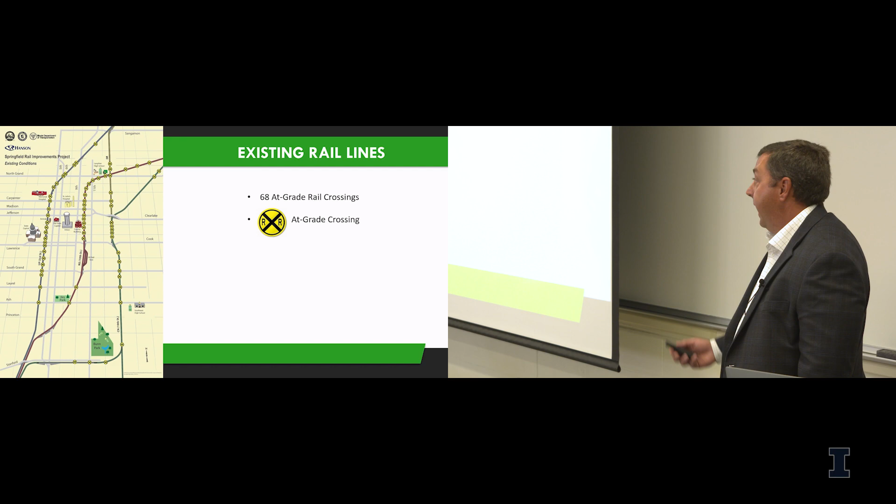In Springfield, there are 3 north-south rail corridors. On the map, on the very far left-hand side is the Union Pacific corridor. That's what we call the 3rd Street corridor because it parallels 3rd Street within Springfield. In the middle is the 10th Street Norfolk Southern corridor, and on the right-hand side is the 19th Street CN rail corridor. In all, Springfield has 68 at-grade crossings, which is a pretty significant amount for a town of about 120,000-ish. It's a pretty high per capita for at-grade crossings. So anytime you have vehicles and trains, there's always a potential of an accident.

In 2010, we did some investigation to determine there's about 35 trains a day going through Springfield. Moving forward to 2030, there's going to be an anticipated 81 trains per day. A pretty significant growth for the Union Pacific, and that's really related to high-speed rail, as well as an intermodal facility that was constructed several years back in the town of Joliet. So a pretty significant increase in both freight and rail traffic through Springfield on the 3rd Street corridor.

The 10th Street corridor is where the Norfolk Southern is at. There's a pretty modest increase in train traffic that's expected there.

The Canadian National Corridor is a little less traveled, with a minor increase in train traffic. In all, we're looking at going from 35 trains per day up to 81 trains per day over the next 20 years.

Rail consolidation in Springfield has been talked about since the 1920s, so it's been around for about 100 years. There was a city plan back in the 20s that discussed the consolidation of rail, but nothing really happened from that other than some at-grade crossings were constructed.

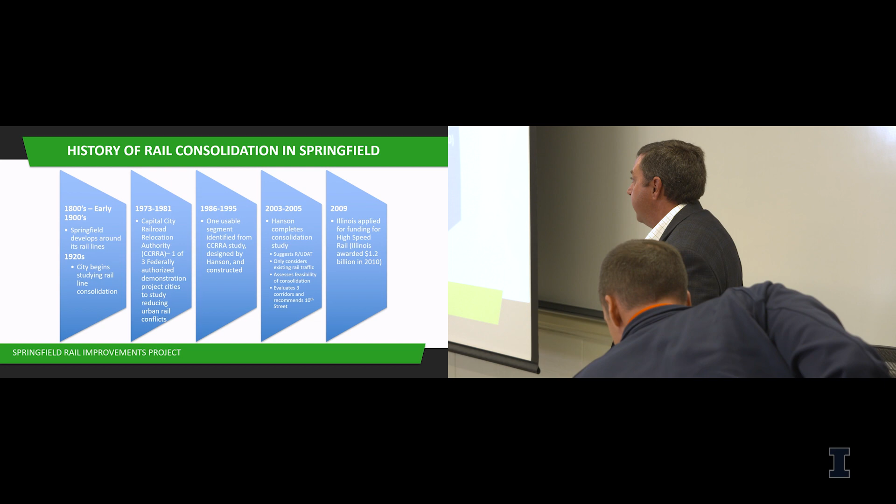In the 70s, there was another project—the Capital City Railroad Relocation Authority—that was started, and that also talked about the consolidation of rail in Springfield.

Moving into the 80s and 90s, part of that project was implemented and we were able to work on it. Then in 2003 to 2005, we were involved in a feasibility study looking at rail consolidation.

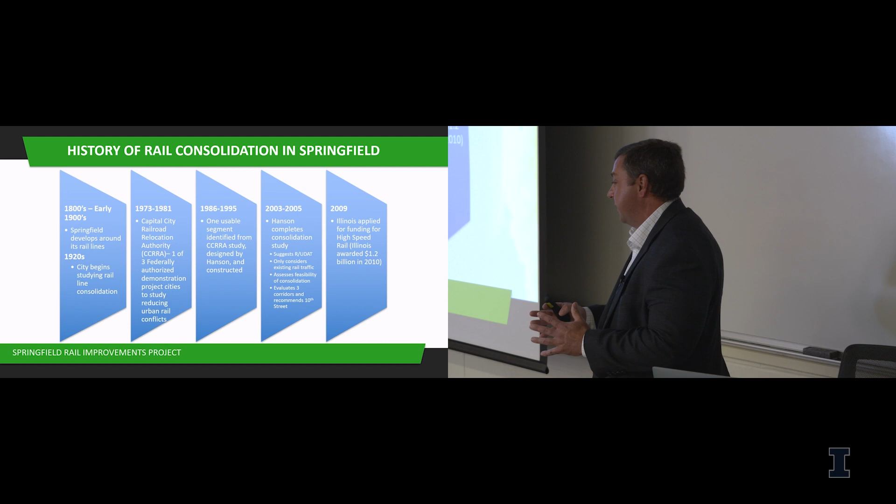Shortly after that, IDOT got $1.2 billion for the high-speed rail program. Since that timeline, we've been heavily involved on the engineering side—environmental work from 2009 to 2012, phase one planning engineering, then real design starting in 2013 through right now.

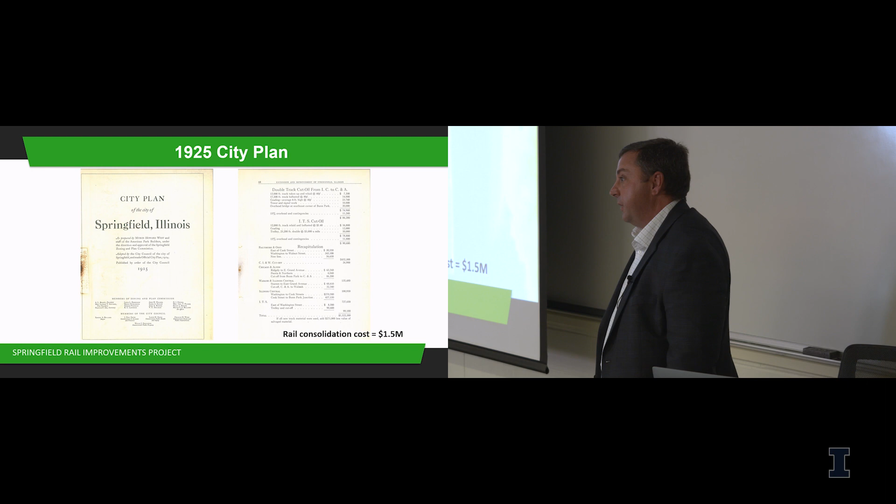We still have some of that issue today along the different corridors in town. When we complete the project, we expect it to be much safer and a lot better place to live for the citizens.

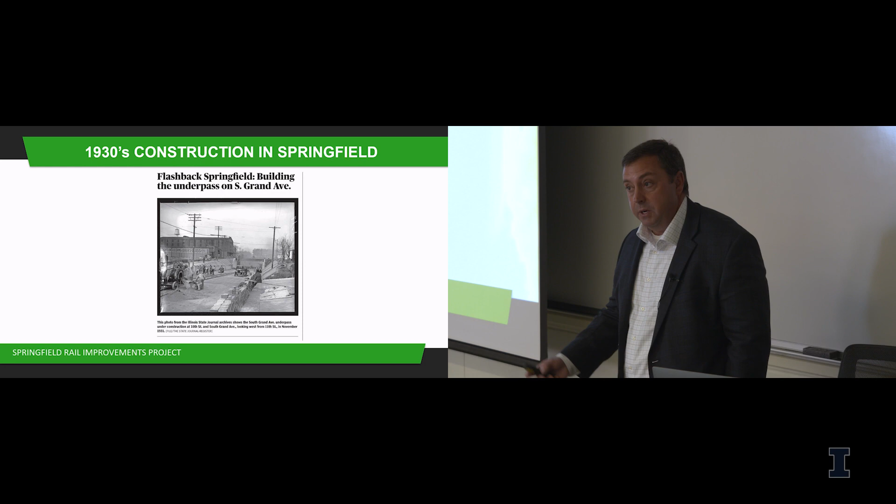None of that consolidation really took place. There are a few rail lines through Springfield's history that dissolved and weren't utilized anymore. But in the 30s, some underpasses were built to promote safety, since so many people were getting killed—this is one of them that we're going to talk about today.

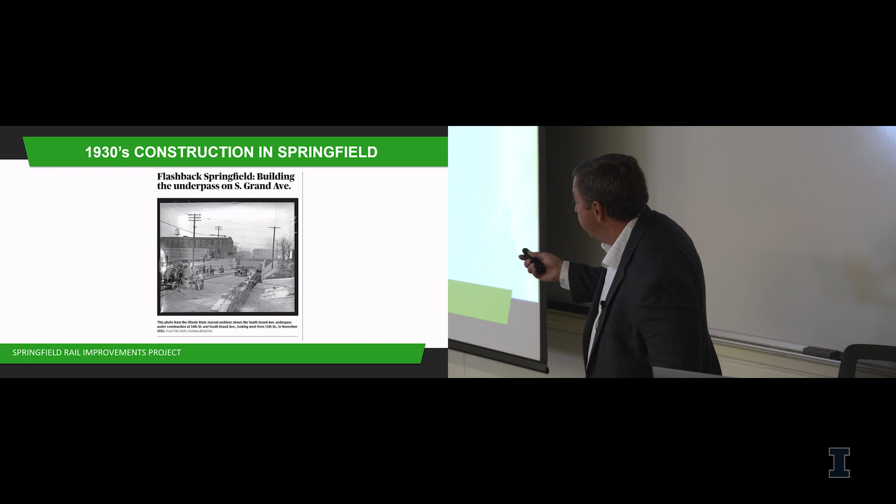It's the South Grand Avenue underpass, constructed in the 30s. You'll see concrete slope walls on the two sides that are still there today—those are going to be reconstructed and the whole underpass redone. Down the middle of the road was an old trolley line, which no longer exists, but back then there were trolley lines through the city of Springfield as well.

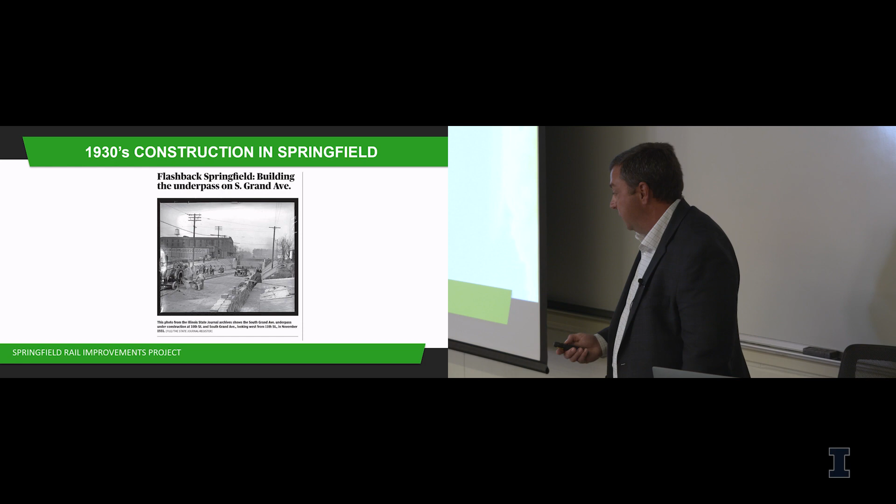Moving forward to the 70s, there was a study completed by the Capital City Railroad Relocation Authority, which also looked at consolidating rail in Springfield. By that time, Springfield had grown quite a bit, so the 19th Street corridor they'd looked at back in the 20s was now well within the city limits.

Within Springfield, we've got three north-south parallel rail corridors, 68 at-grade crossings, traffic that's going to more than double on the rail, and speeds that need to increase for the UP corridor as well. The objective is to determine the best location to consolidate rail within Springfield and make this a very livable corridor, where people can commute safely from the east side to the west side or vice versa.

The study limits of the project were from Stanford Avenue, in the southern part of Springfield, to Sangamon Avenue, in the northern part of Springfield.

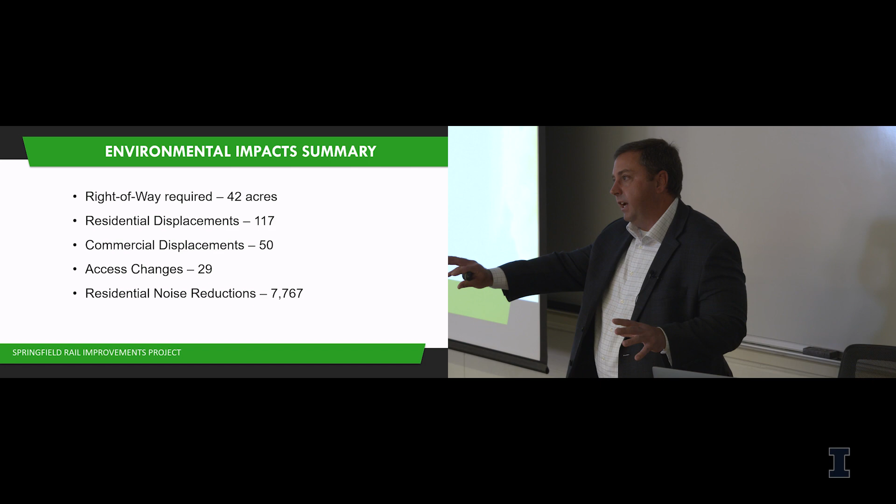Two parts to that: you're obviously getting rid of one rail corridor and bringing it over to another one, so you mitigate a lot of sound along that corridor. In addition, we're looking at implementing a quiet zone through the city of Springfield where the trains don't sound their horns, or we minimize the amount of time they sound their horns.

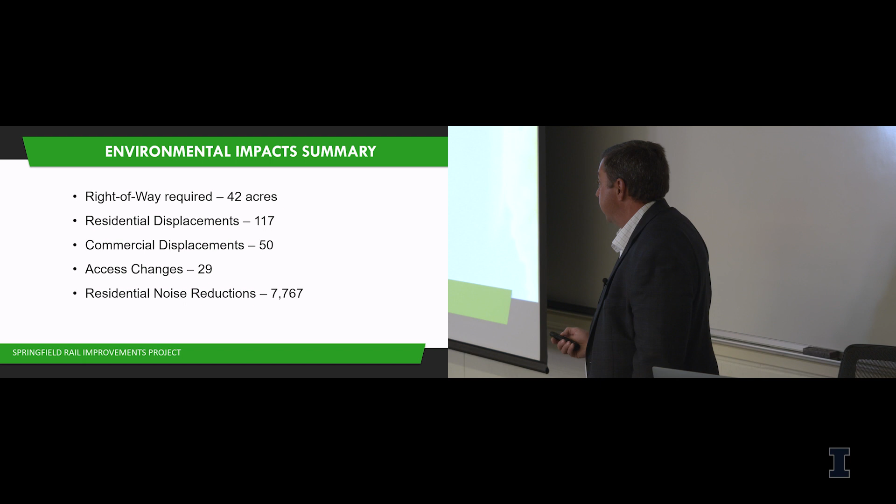So why is the project needed? To promote pedestrian and vehicular safety—I've already talked about the issues with a lot of the pedestrians. It would reduce congestion and delays, by about 80%. So not only are you able to get through town easier, there's also a lot less emissions created, so there are environmental benefits as well.

Eliminate train horn noise and increase the economic growth of Springfield. We're not talking about a very minor increase—just within the hospitals of Springfield, we're talking about close to $1 billion in economic growth that removing the 3rd Street corridor and putting it over to the 10th Street corridor will promote. So very significant for the city.

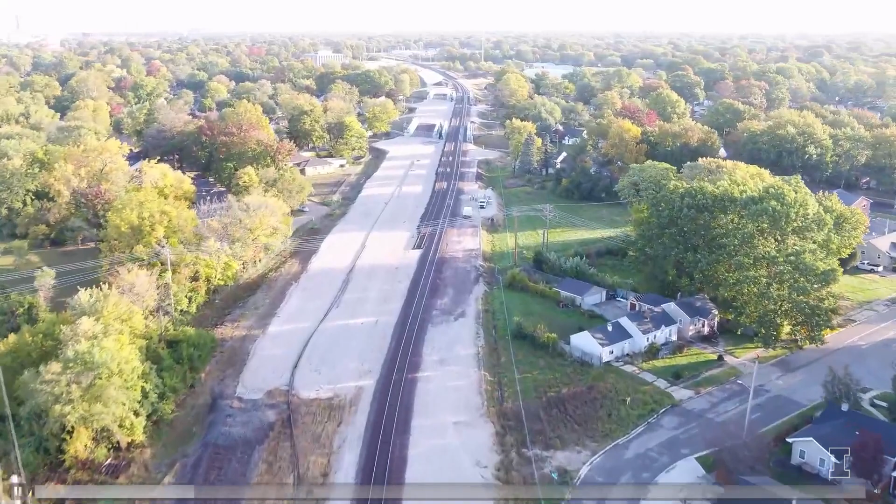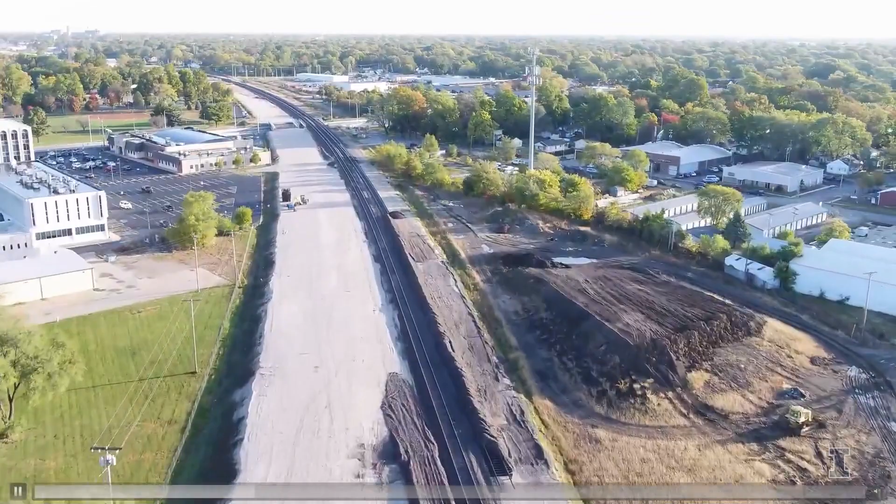Usable Segment 2 extends from 6th Street to South Grand Avenue and includes 2 new underpasses at Ash Street and Laurel Street. The Ash Street underpass construction began in the fall of 2017 and was completed in November 2019. The Laurel Street underpass began construction in the fall of 2019, was completed on September 20th, 2021, and opened to traffic. The sub-ballast grading for the Norfolk Southern track bed is complete from Ash Street to South Grand Avenue.

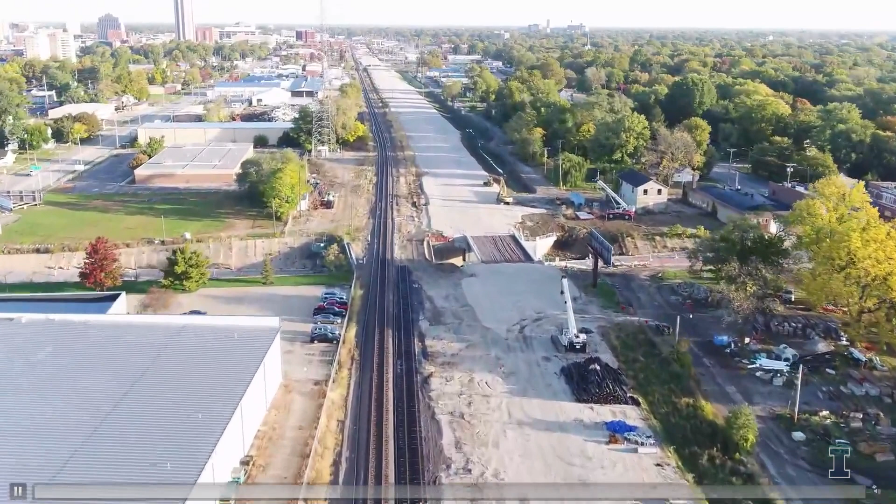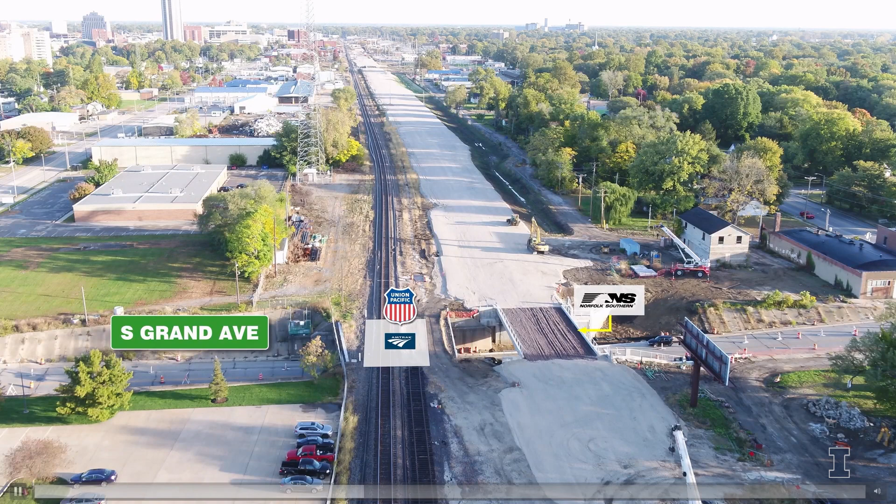Usable Segment 5 extends from South Grand Avenue to Capitol Avenue and includes bridge replacements similar to the 5th and 6th Street bridges, at South Grand Avenue and Cook Street. Construction began in July of 2021 and is anticipated to be completed in 2023. The Norfolk Southern Bridge over South Grand Avenue is complete.

The contractor is completing retaining wall work along South Grand Avenue. The sub-ballast has been placed and compacted for the Norfolk Southern Rail Corridor from South Grand Avenue to Capitol Avenue. The Norfolk Southern is expected to begin track construction for Usable Segment 5 and have the tracks shifted to the new alignment by the end of 2022.

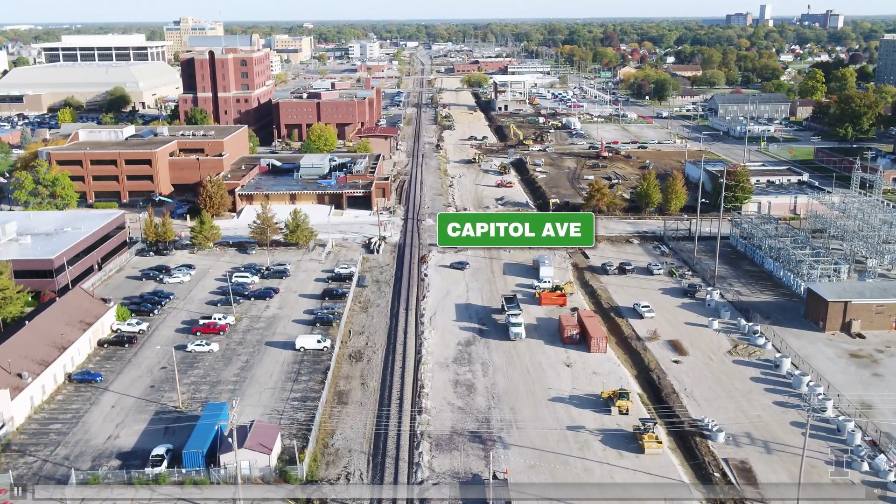Usable Segment 3 extends from Capitol Avenue to Madison Street and includes 2 new underpasses at Madison and Jefferson Streets and the construction of the new Springfield-Sangamon County Transportation Center. Capitol Avenue is currently under construction and is expected to be completed in the fall of 2022.

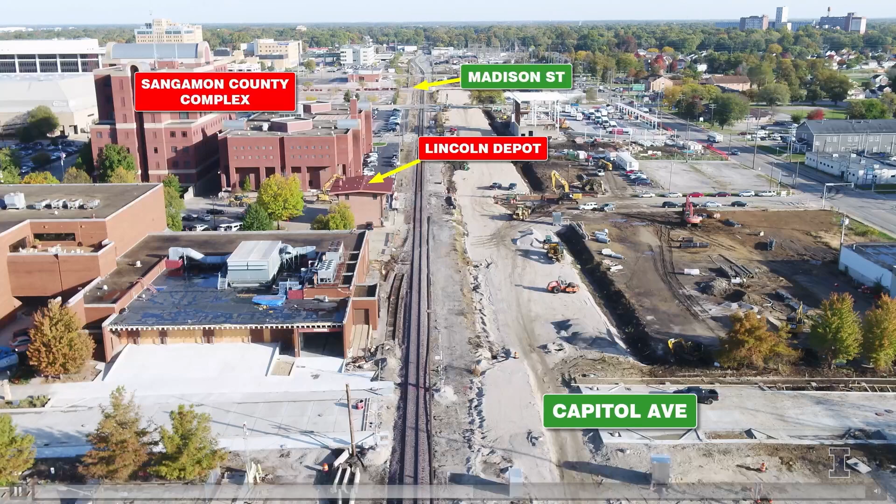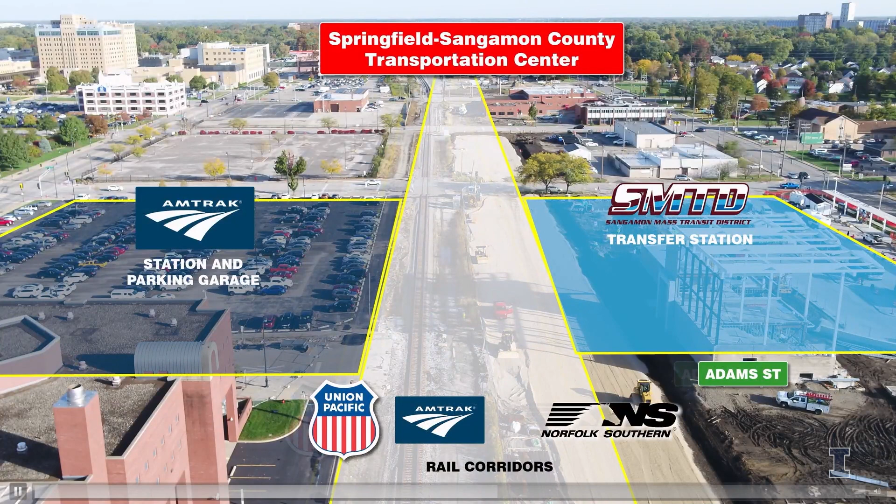A jack and bore operation for a new sewer is currently underway at Monroe Street. The new SMTD transfer facility will be on the east side of the tracks, and the new Amtrak station and parking garage will be located on the west side, with a pedestrian bridge connecting the two facilities. The parking lot for the bus transfer facility is completed.

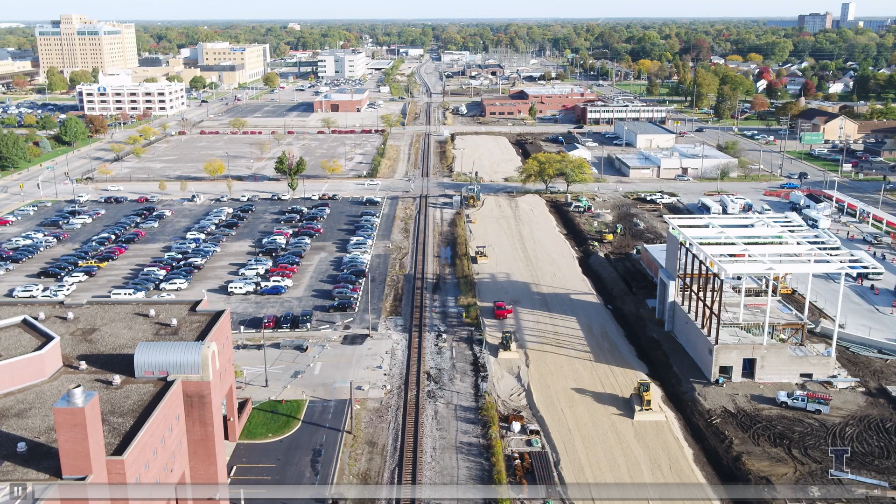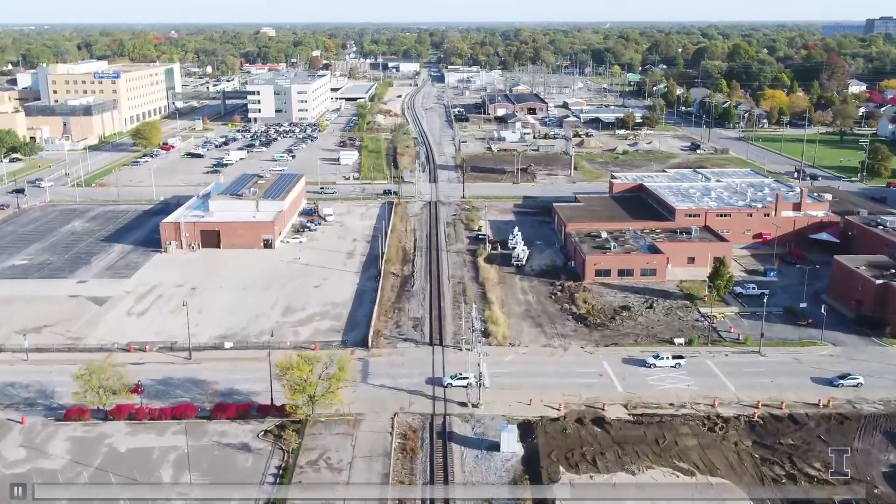Transportation Center construction began in August 2021 for the SMTD transfer station and will be completed in early 2023. Construction for the Amtrak station and parking garage will begin in mid-2023 and will be completed in 2025. Usable Segment 3 construction has begun with a completion date targeted in late 2024.

Both underpasses at Madison and Jefferson Streets will be constructed at the same time during a 14-month closure of Madison and Jefferson between 9th and 11th, starting in April of 2023.

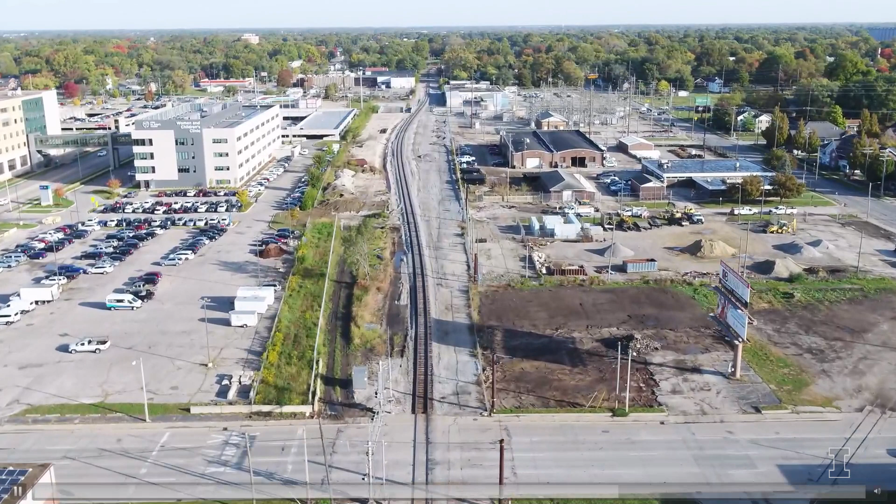Usable Segment 1 extends from Madison Street to Carpenter Street and included a new underpass at Carpenter Street. The 1908 Race Riot archaeological site was discovered in this segment. The Carpenter Street underpass construction began in the summer of 2014 and was completed on time and under budget in the summer of 2016.

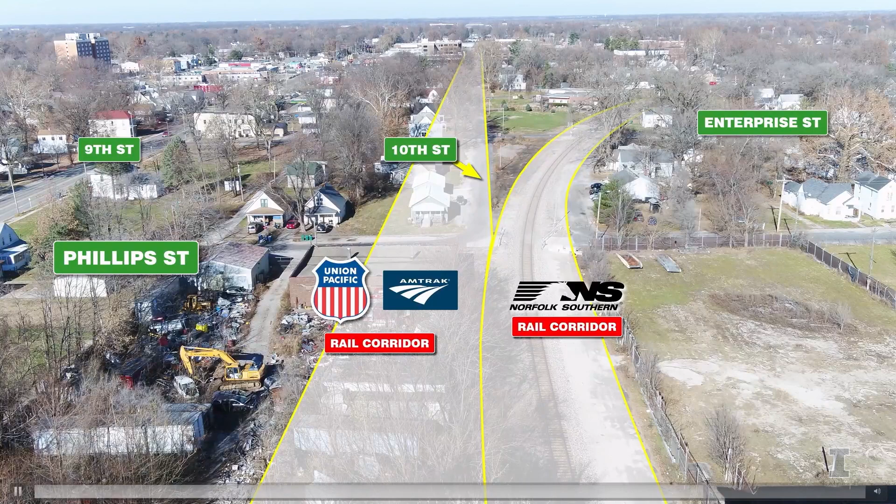Usable Segment 6 extends from Carpenter Street to Ridgely Avenue and includes a new underpass at North Grand Avenue. The Union Pacific tracks and Amtrak continue north to Chicago, and the Norfolk Southern tracks continue east towards Decatur.

This segment includes a new railroad corridor from Phillips Street to Ridgely Avenue, with construction scheduled to begin in late 2023 and a completion date in late 2025. The new underpass at North Grand Avenue includes a bridge for the Union Pacific Railroad.

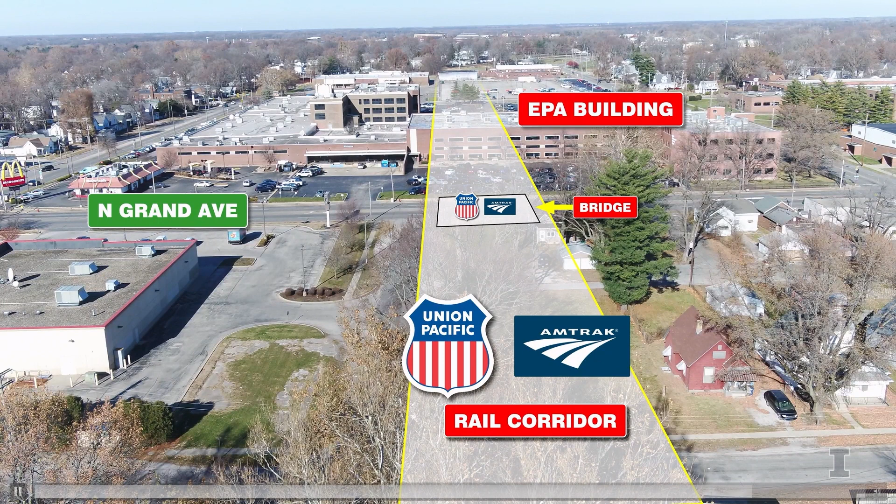An overpass carrying North Grand Avenue over the Norfolk Southern and Illinois and Midland Railroad near Robin Roberts Stadium will also be constructed as part of Usable Segment 6. The rail corridor will bisect the EPA building along North Grand Avenue and will continue north immediately east of the Bingo Hall. The northern terminus of this segment is at the existing Union Pacific tracks north of Ridgely Avenue near Sangamon Avenue.

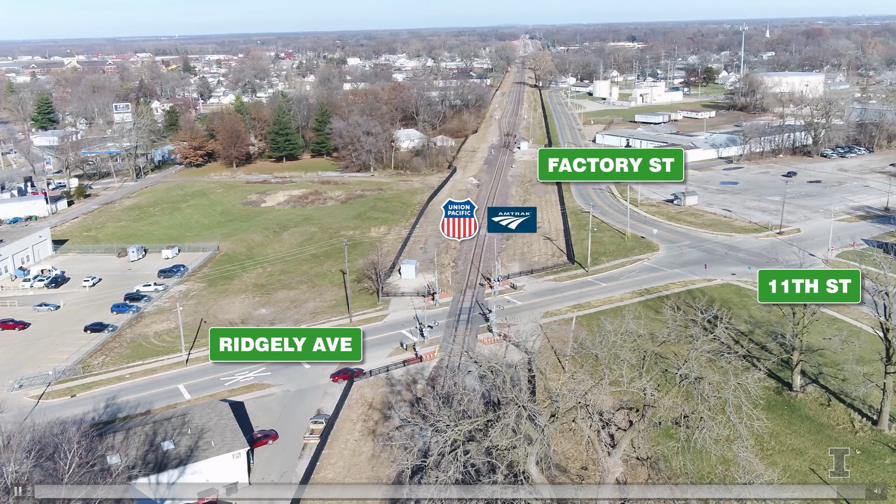After Usable Segment 6 is complete, the Union Pacific and Amtrak will begin operating their trains along the new 10th Street Rail Corridor in late 2025.

We do those drone videos on a monthly basis to update everybody on where construction's at on the project, which does a great job helping people understand the overall project and give a bird's eye view of the construction going on.

The rail corridor itself is going to be about 140 feet wide, with 2 tracks for the Union Pacific and 1 track all the way through for the Norfolk Southern. Part of the corridor, probably about half to two-thirds, will have 2 tracks. There will be enough room in the overall corridor if Norfolk Southern ever wanted that second track to go all the way through.

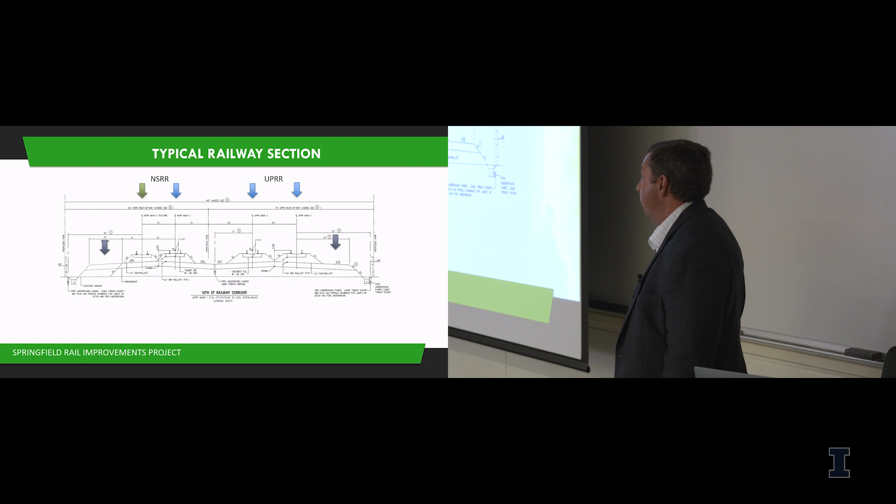On both sides, there's going to be maintenance roads, one for the Union Pacific and one for the Norfolk Southern as well. The rail itself is a 136-pound rail. The Union Pacific will utilize concrete ties, and Norfolk Southern will utilize wooden ties. So there's a little bit of difference between the 2 railroads, but nothing too substantial.

On both sides of the corridor, along the far left and far right-hand side of the right-of-way, there's going to be a 6-foot black ornamental fence along the entire corridor. That's to help keep pedestrians and people out of the corridor so we don't have any fatalities. It's a huge safety issue, and it's actually one of the number one issues right now for the Illinois Commerce Commission—pedestrians trespassing on rail corridors is actually more of a problem than vehicles getting into accidents with trains.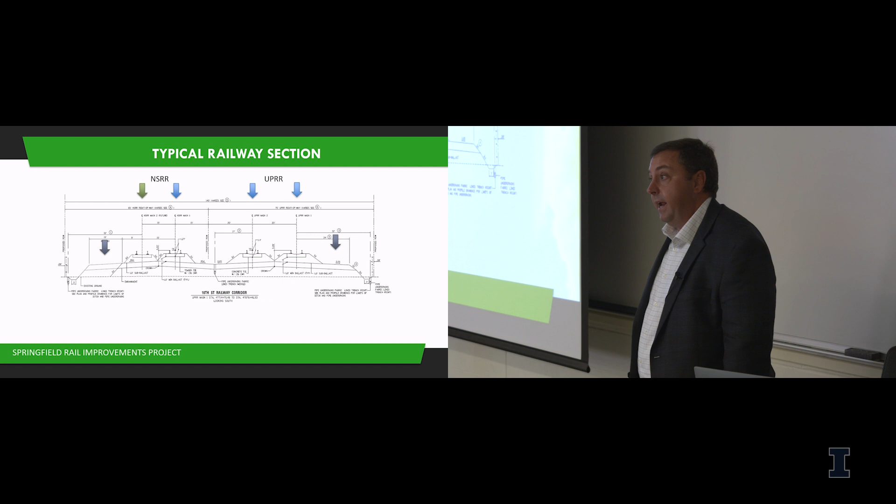There are many different aspects of this particular underpass I want to talk about from a safety standpoint. One thing during our public outreach was that people wanted to feel safe going through an underpass, whether walking or driving, so lighting was of huge importance. These underpasses have a lot of lighting to help people feel safe as they're walking or driving through.

In addition, the sidewalks on the two sides are elevated. The roads go down at a very steep grade, about 8%, but those sidewalks are held at a shallower grade to help meet ADA requirements—accessibility requirements for people in wheelchairs. That makes it a lot easier for those with handicaps to go through the corridor.

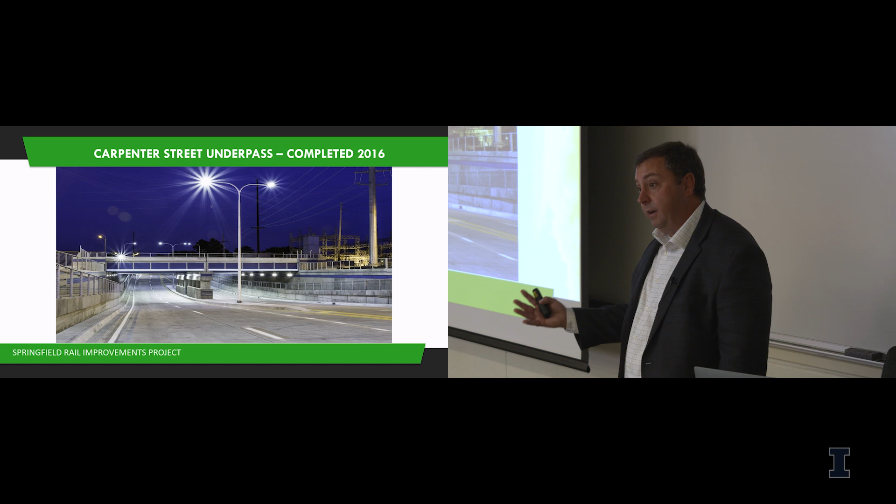We also took into account aesthetics, keeping somewhat of a uniform theme throughout the project for what the underpasses would look like. There are a lot of different disciplines involved with a project of this magnitude. You obviously have the rail aspect—track design and alignment—but also structural engineering for bridges and retaining walls, geotechnical engineering, electrical engineering for lighting, mechanical engineers for the pump station I'll talk about, and traffic engineers for modeling to make sure we've got enough lanes of traffic and to look at congestion delays. So there's lots of different disciplines that go into a project of this magnitude.

One of the biggest complaints we got during initial planning was, why would you put an underpass in? They flood. Now this corridor, where we want people to be able to go from the east side to the west side or vice versa—when it floods, you can't get anywhere. So one of the things we implemented as part of this project is about 45,000 gallons of storage at this particular underpass.

There'll always be a maintenance point when some of these pumps have to be pulled out and maintained, so you'll still have a separate pump there to pump the water out. This location also has redundant electrical feeds, so if the power goes out in a certain part of town, another power supply comes to this pump station. That was an item incorporated in the pump station by the hospitals, so that was very important.

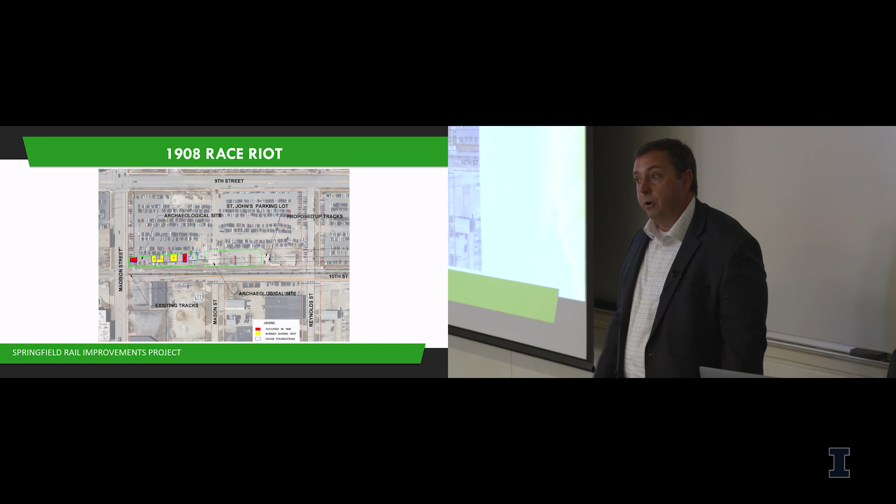During construction, one of the very first things the contractor did was go out and remove pavement in part of the area where the tracks were going, so an archaeologist could come in and investigate. During their investigation, they did uncover homes that were burnt during the 1908 race riots in Springfield. What's significant about the 1908 race riots is that they led to the catalyst for the formation of the NAACP as we know it today. It was a very historic event that occurred in Springfield, Abraham Lincoln's hometown, that led to the formation of the NAACP.

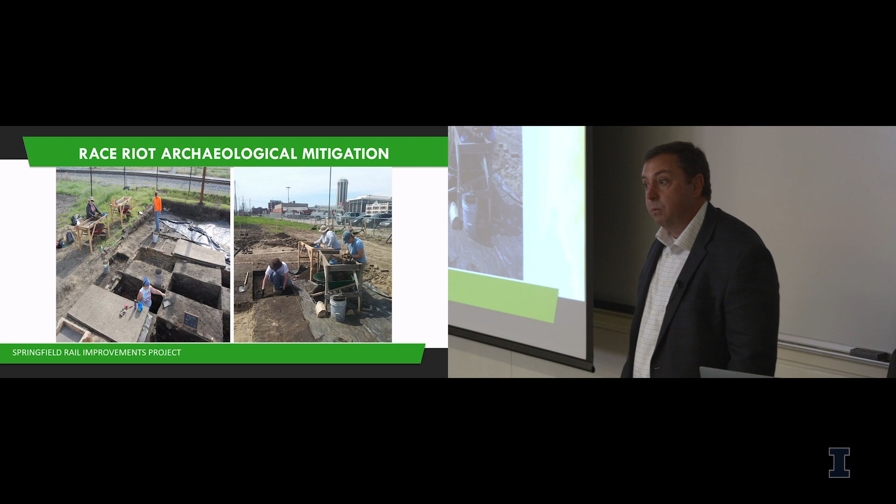So one of the things we had to do when we came across this was shift the rail alignment a little bit—not a significant shift, but a minor shift toward the east to avoid some of these homes. In addition, we had to go in and do investigation and dig out any artifacts within those homes, foundations, cellars, and things they had.

So this just shows one of the houses that was complete. This is what it looked like underground. It had just concrete pavement over the top of it, so this is what was below a parking lot.

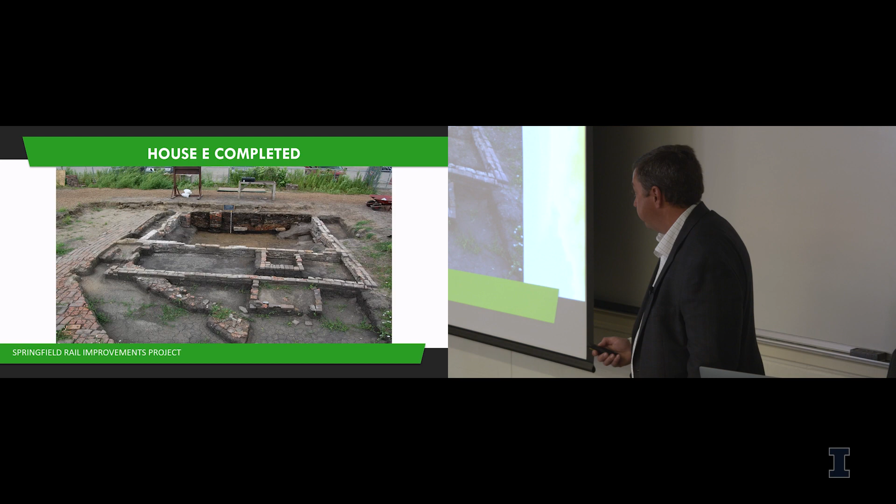One of the artifacts they found, I think this is really one of the most significant ones, very interesting. There's a medal that was given out during the Spanish-American War to the 8th Regiment, which was comprised of African Americans. This was found during the archaeology dig of that site, so quite a historic, significant finding we came across.

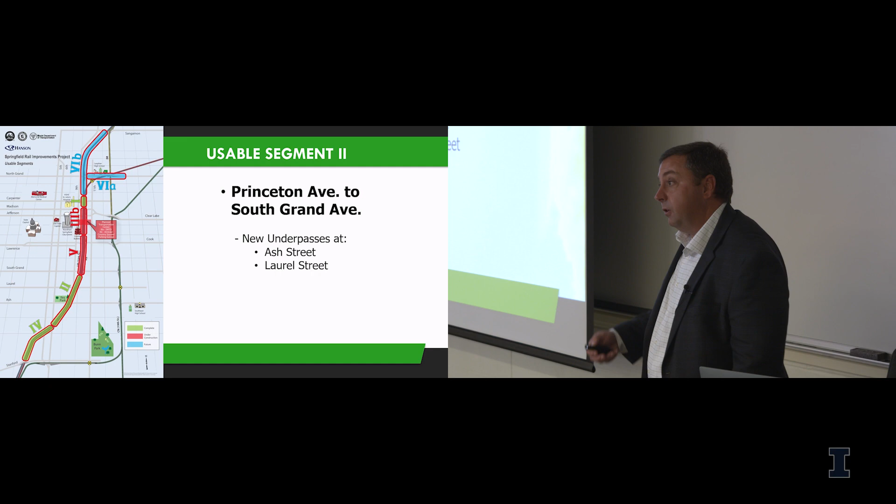The next segment of the project was usable segment 2, which included new underpasses at both Ash and Laurel Street, along with a lot of track construction work. I want to talk about the staging of how the track is constructed alongside these underpasses. When you get into construction, you've got to keep the rail lines open for the railroad during construction. That's very critical to them, with only very small shutdown periods when they tie the tracks in.

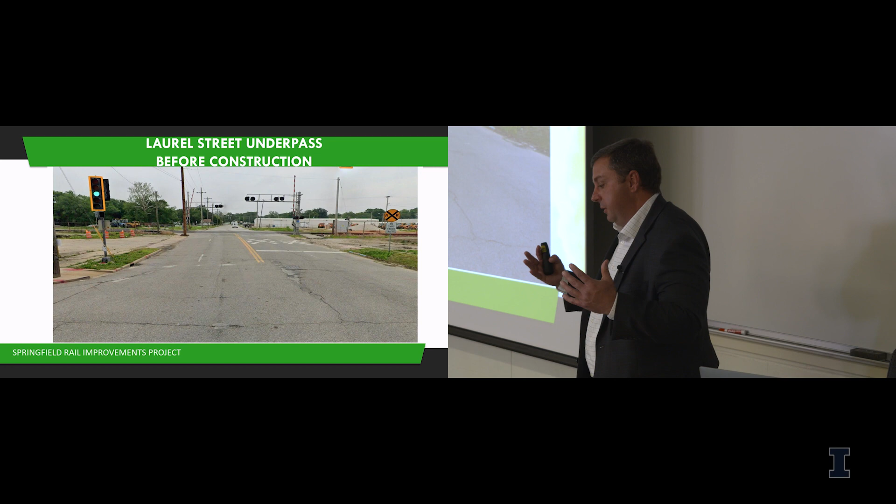This is a typical at-grade crossing in Springfield. This is Laurel Street, also converted from an at-grade crossing to an underpass. One thing I want to point out is if you're somebody in a wheelchair trying to go down these sidewalks, it would be terrible, you're liable to get stuck. It's not a very good path for those people.

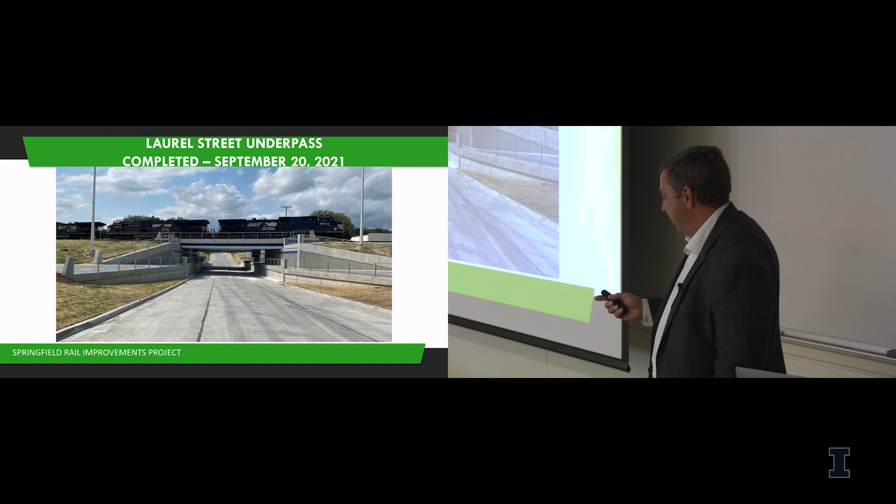This is what it looks like now. You've got the elevated sidewalks with a nice, slow, gentle grade down, and railings that separate the pedestrians from the ledge. This photograph was taken about 2 days before it opened up. The striping still isn't complete on the road, but we do have striping. I happened to be out there taking a picture right when Norfolk Southern had a train coming across the bridge.

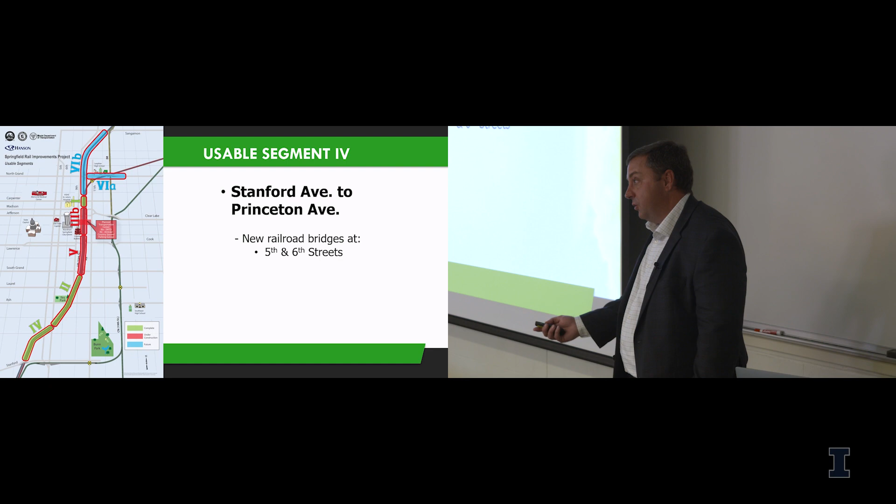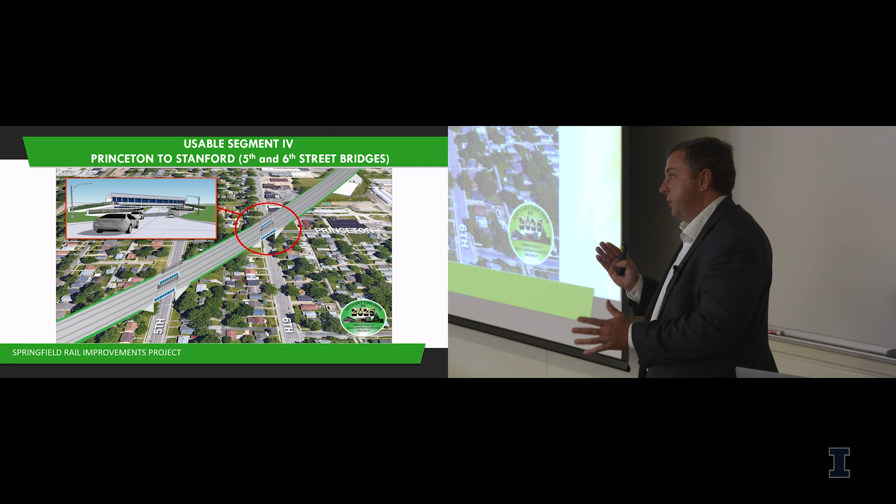That's what the new bridge is going to look like, at both 5th and 6th Street. It'll go from one bridge for the Norfolk Southern holding a single track to a double wide bridge holding 2 tracks, and then you have a second bridge as well for the Union Pacific. So there's a lot of track construction required as part of this project.

One of the most significant items is the bridge itself. The beams had to be 13 feet, 2 inches deep - that's a little taller than this ceiling. We're talking huge beams for these bridges, about 155 foot span length, holding up 2 tracks. It requires 2 of these bridges, and it's a through plate girder.

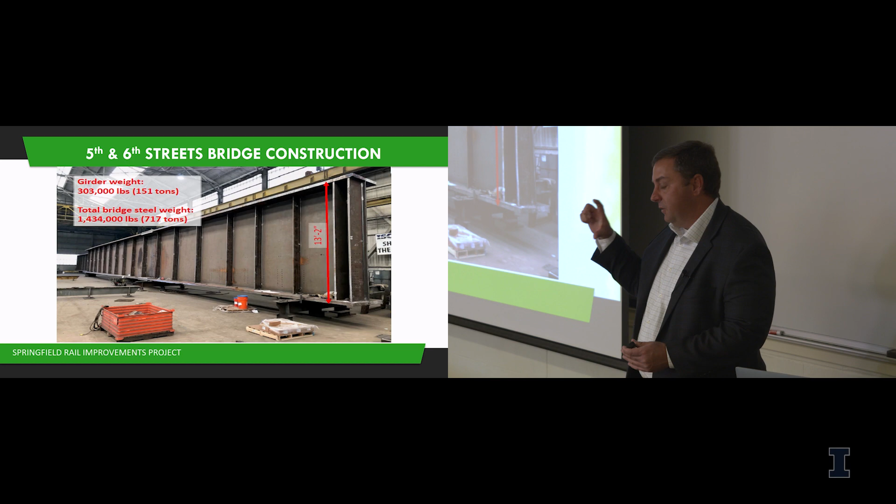The bottom plate and top plate that make the flanges of those beams are about 48 inches to close to 50, I think up to 54 inches wide, and 4-inch thick plate. So you're talking steel that is very, very thick. They weigh about 300,000 pounds each, those beams.

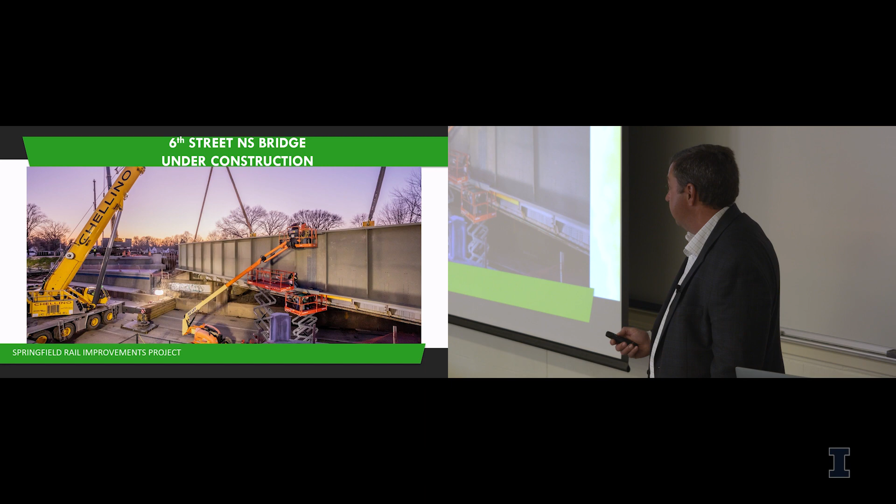During a 10-day shutdown of the road, the bridges were constructed. They had 3 cranes come in to lift up the various pieces to build these bridges for the track. Once the girders are up, they swing floor beams in, and that comprises your structure. It's almost like a U-shaped type bridge that you drive through - it's called a through plate girder type bridge.

Once those pieces are on, then they waterproof the bridge. Those are the different colored coatings that you see here. It's a spray-applied membrane. Once that is down, there's a kind of drainage trough that goes across it, and then they place

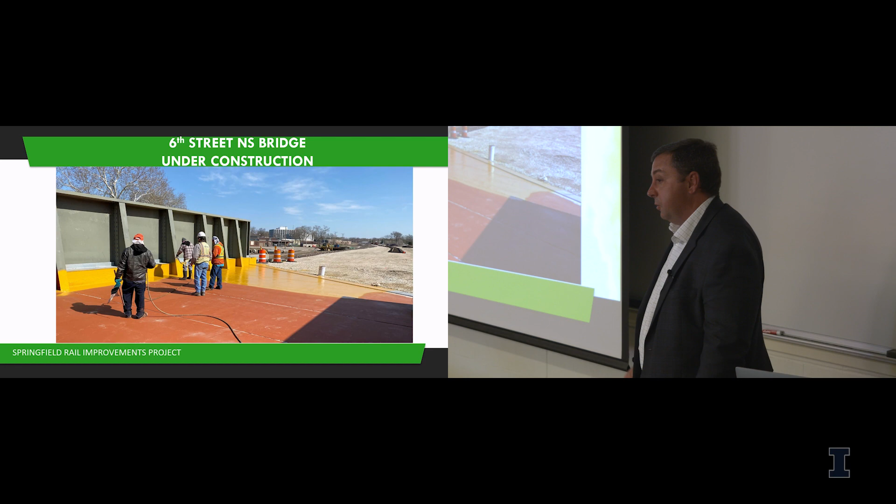the ballast for the rail corridor on top of that. And here in the photo I want to point out that Norfolk Southern has built their track. You can kind of see it right there on the far right hand side of the picture, right up to the bridge. So they're within a matter of a day or two of getting to the bridge and then able to just build their track right across it.

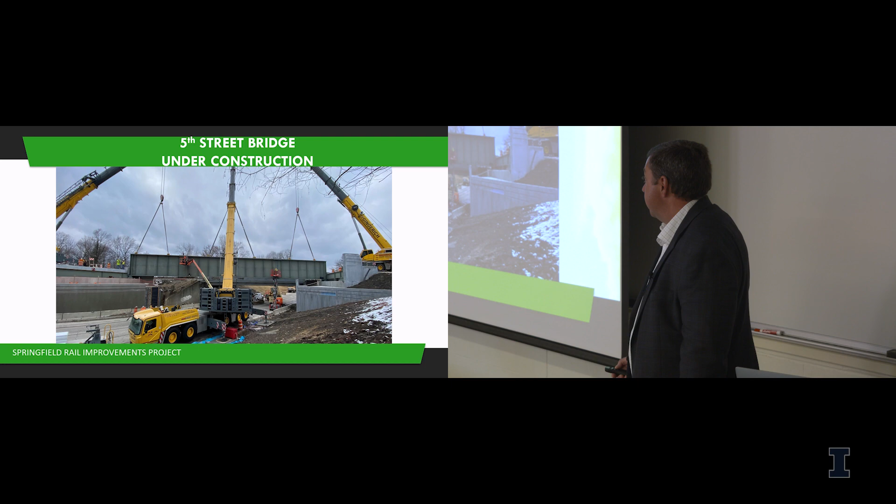So that was the 6th Street Bridge you're looking at. This is the 5th Street Bridge, very similar. Here you can see the 3 cranes that it takes to hold up these massive amounts of steel to construct the bridge. In this particular one, this was at the very tail end of it. Had a snowstorm come through, similar weather to what Champaign gets, but it got down to about 0 that night.

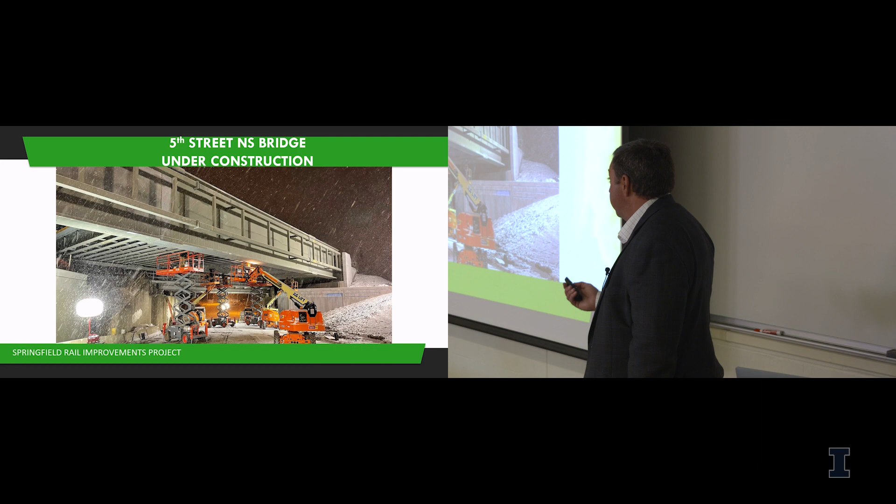This is during a 10-day closure of the road where the contractor's working both day and night, and they're out there welding some of the deck plates down at this point on that bridge. This was around maybe 8 or 9 o'clock in the evening on a Friday or Saturday, can't remember which night it was, but it was out there snowing, and construction workers, you can't say enough. They're hardy men and women that are out there working through the elements. So pretty amazing.

With respect to the shutdown, the contractor, if they didn't get the bridge completed in time, had a $6,500 penalty per hour that the road wasn't open. So we put a pretty significant penalty because this is a major thoroughfare for Springfield and wanted to get that road opened up as quick as possible.

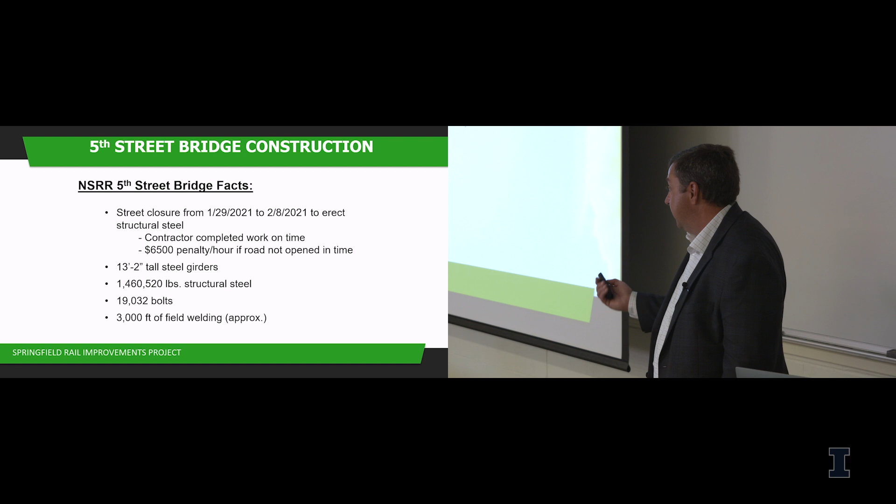You can just see some of the facts there regarding the bridge: 13-foot tall girders, 19,000 bolts that they had to install in the matter of that 10-day shutdown, and then about 3,000 feet of weld out in the field that had to be placed too.

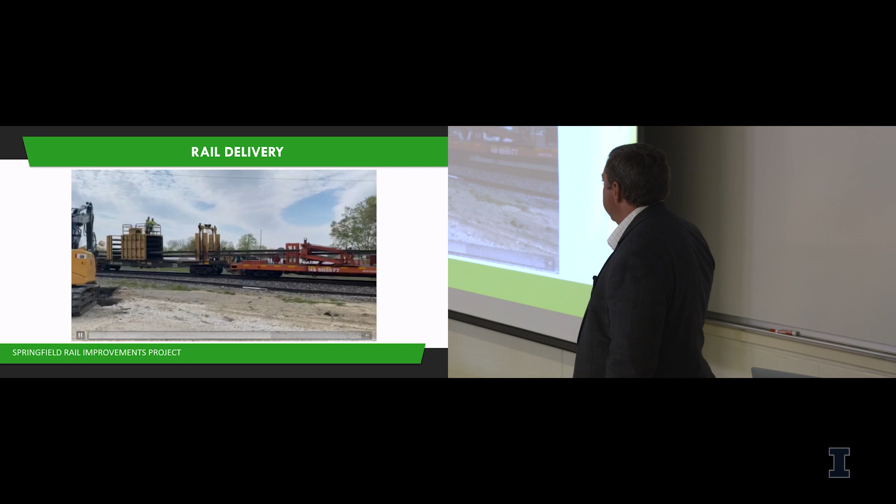This is going to be a short video. So after the bridges were built, Norfolk Southern then brought in their rail train, hopefully this plays, to deliver the rail to the site. This is just a very short video clip of the rail showing up. But basically the train came in and then they laid the rail down and dropped off the quarter-mile segments of the rail.

After the rail was there, then they had a contractor construct the track itself. So they brought the ties in. They go out, first thing they do is survey the alignment for the track. Then they'll go out and set the ties down, and they place those. They have a truck that they utilize to set them down, and then some guys kind of shifting them around to get them into alignment.

Then they pull the rail up onto those ties. After the rail's on the ties, they spike it down and start bringing all the ballast in, and then raising up the track to the right level.

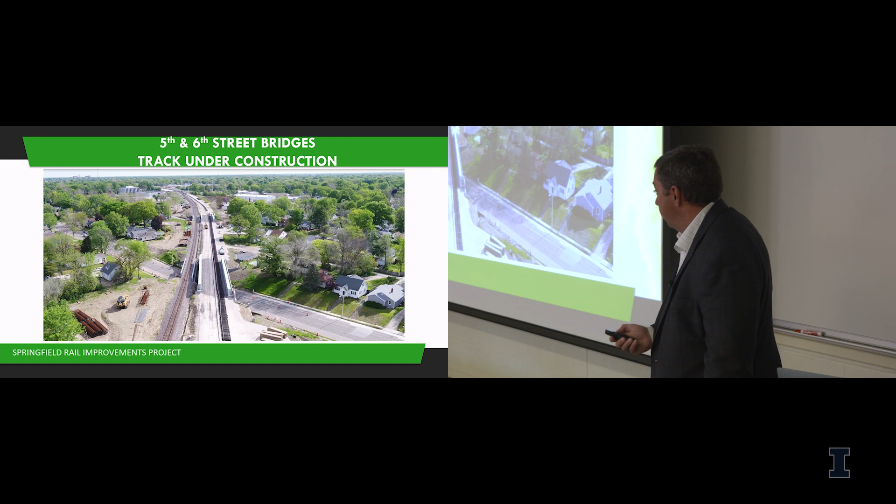This was the first train that happened to go across the new track and the new bridges. Just happened to be out there that day and got to see that happen.

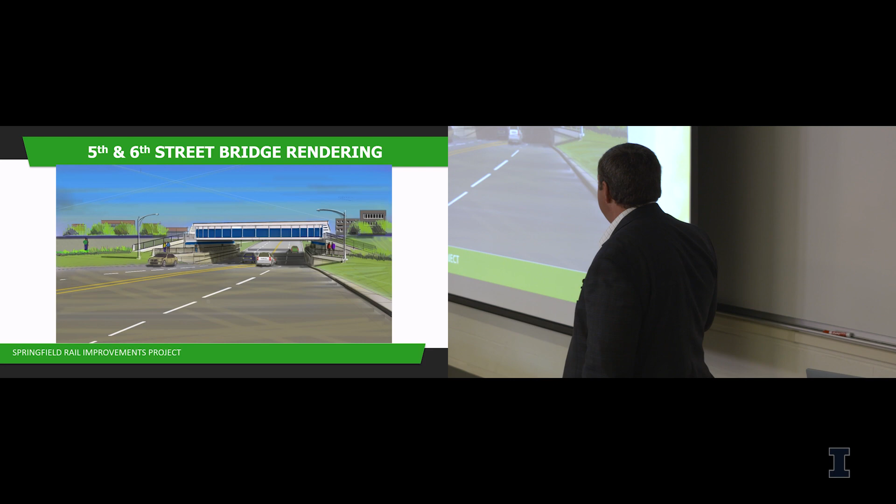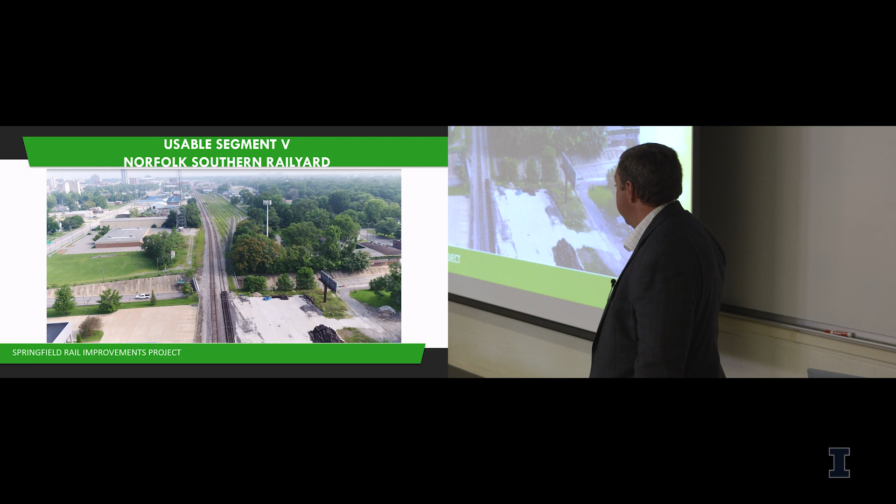reconstruction of existing underpasses at Cook and South Grand. This is South Grand that you see in the picture here. This was the underpass that I had a photograph of as an old picture from the 1930s. So now we're getting ready. You can see the concrete slope walls that were a part of that. They're obviously in pretty poor shape, but what I want to show you is the most important thing.

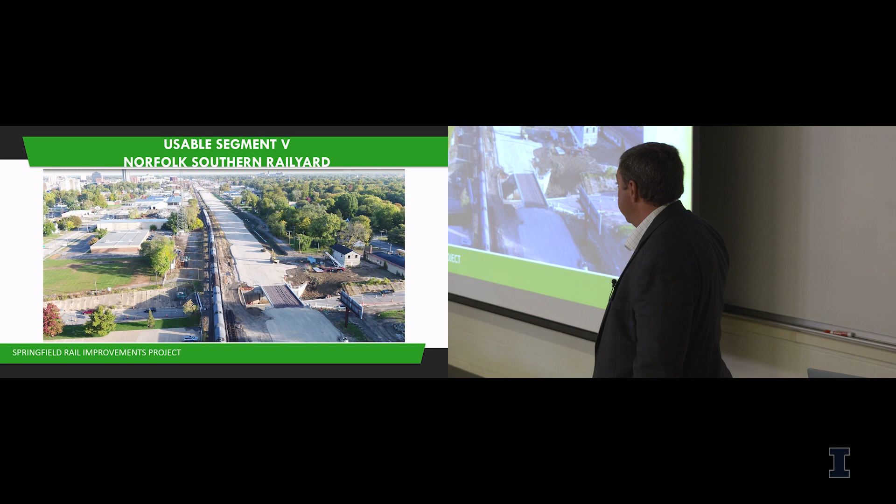There's a rail yard just to the north, and this shows how it's staged. The tracks are on the left-hand side, and the contractor builds the underpass, the new bridge on the right-hand side. Once that's complete, and we're to that point now with the sub-ballast down and everything, the Norfolk Southern will build track across the new bridge, shift their trains onto it, and operate on the new bridge. Then they'll tear out the old bridge, put a new bridge in for the Union Pacific, and complete the rest of the reconstruction of that underpass.

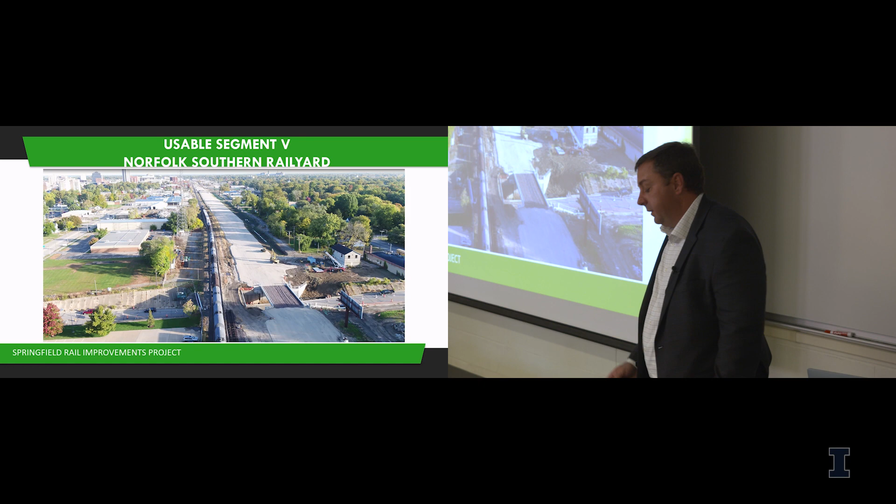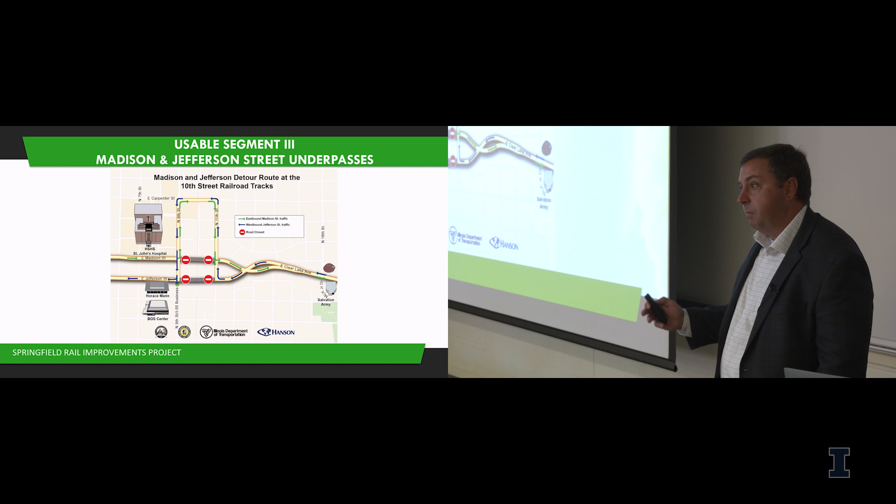One of the things we do is reach out to the community as part of the project, creating maps like this to share and make things easier for people to understand where the detour routes are. This is part of a press release that will go out once Madison and Jefferson are closed for construction.

The aerial photo here is of the Capitol Avenue at-grade crossing under construction. That crossing is going to be opened up in the middle of November. There are actually bricks that will go on top of the concrete pavement, and then they do an HMA surface right where the tracks go through. That's going to be completed very shortly.

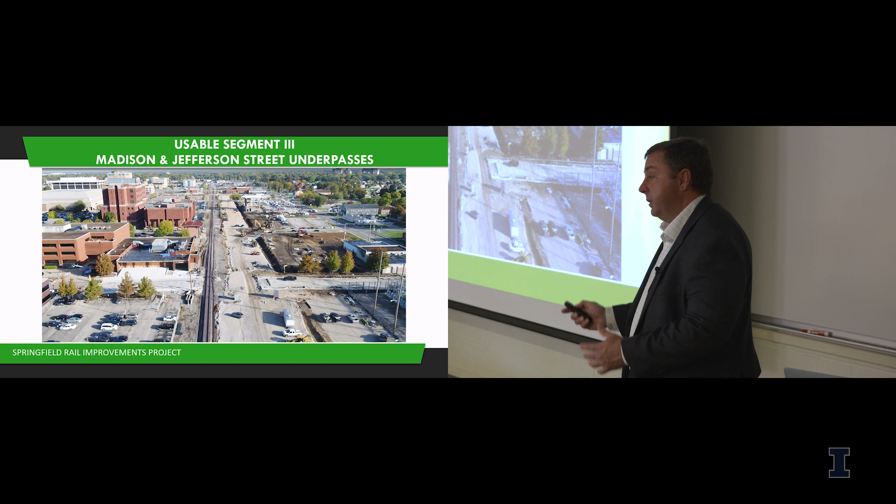In addition to that, you can see some of the work for the rail corridor that's going on as well. A lot of the grading, and there's a lot of drainage work involved too, to cut ditches in and have a lot of pipes that cross, especially in an urban area where there's storm sewer everywhere.

The last segment of the project is usable segment 6, the very last piece that's going to go to a construction letting — meaning that's when the project bids. That will be in November of next year. This will have a new underpass for the Union Pacific at North Grand, which is the usable segment 6B portion, and then a new overpass that goes over the Norfolk Southern and Illinois Midland Railroad, along with some permanent road closures as well as more at-grade crossings that have to be reconstructed.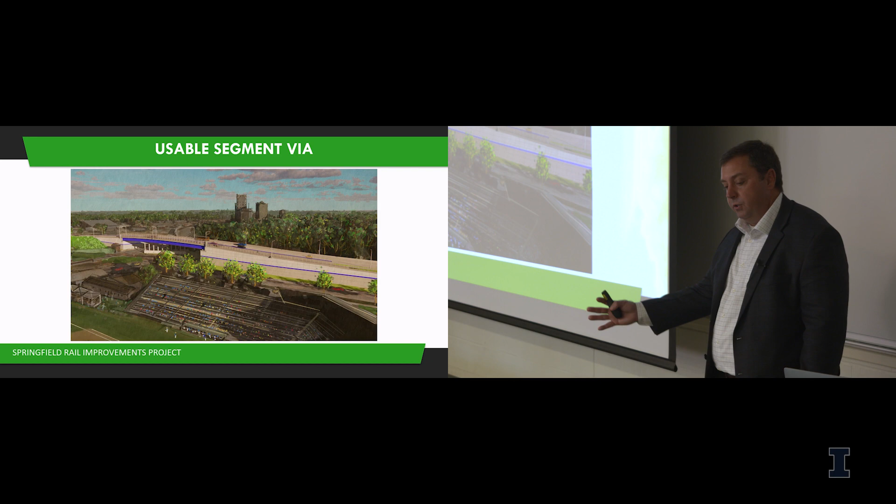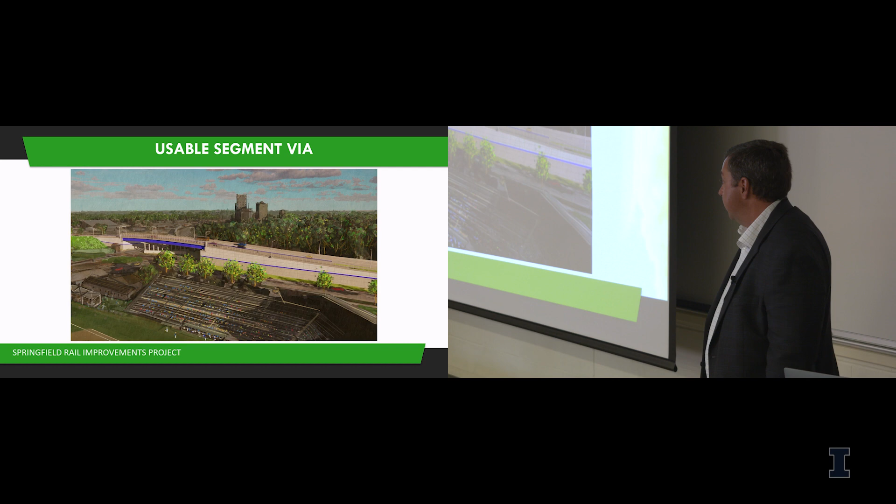This is just a rendering of one of the overpasses that'll go over the Norfolk Southern and Illinois Midland tracks. This is taken looking out from Roberts Ballpark in Springfield — standing up in the air at that stadium looking out at the underpass. We wanted to make this look somewhat similar to a lot of the underpasses through the town. Here's another view of it on top of the bridge. There'll be a multi-use trail to allow both bicyclists and pedestrians to utilize to go across the tracks.

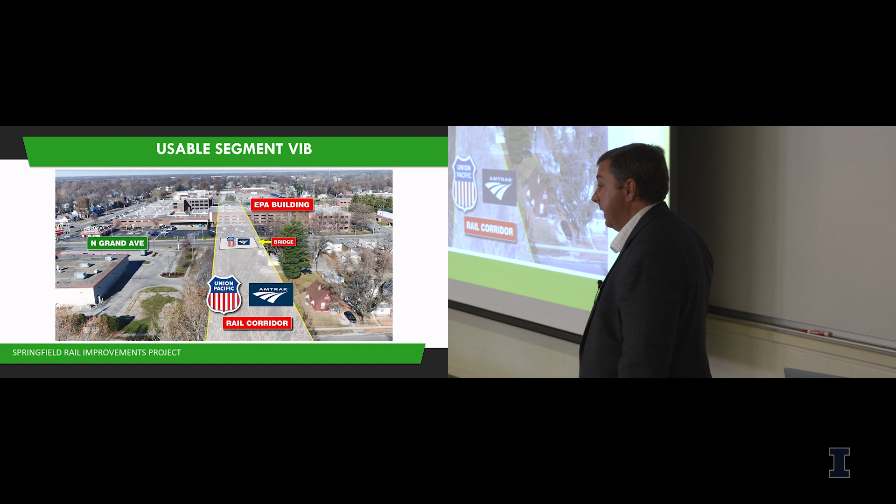The other part of the project is the underpass — this is the part you saw in the video where the tracks will end up going right through the IEPA building. Just the middle of that building is what's going to be demolished. The part on the right-hand side will remain as a warehouse, and the part on the left-hand side will remain as office spaces. Currently, the state of Illinois, working with CDB and CMS, has multiple projects reconstructing some office spaces in Springfield to get them ready to house the people that occupy those buildings.

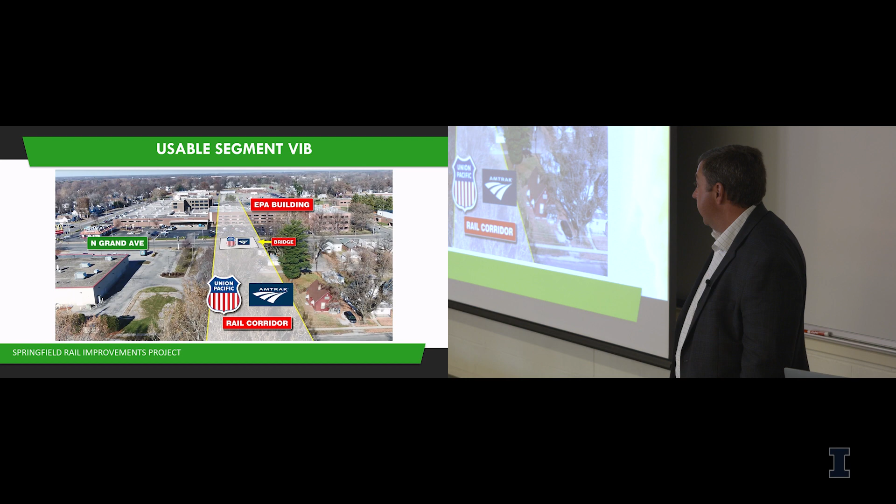So come end of 2023, the people within those buildings will be relocated to other facilities, and then the middle portion of that building can be demolished. There will be an underpass along North Grand Avenue, and then a bridge for the Union Pacific where the tracks will go over the top of the road, similar to the other locations.

As part of the project, there's a current Amtrak station on the 3rd Street corridor right now. So if the tracks are going to shift from 3rd Street over to 10th Street, we've got to build a new Amtrak station. The rest of this I'm going to talk about is the new transportation center. The large brick building on the right-hand side is the Sangamon County Complex, where the courthouse and jail is in Springfield. It's existing right now. The Amtrak station and parking garage are going to connect directly to that and extend to the north, on the west side of the tracks.

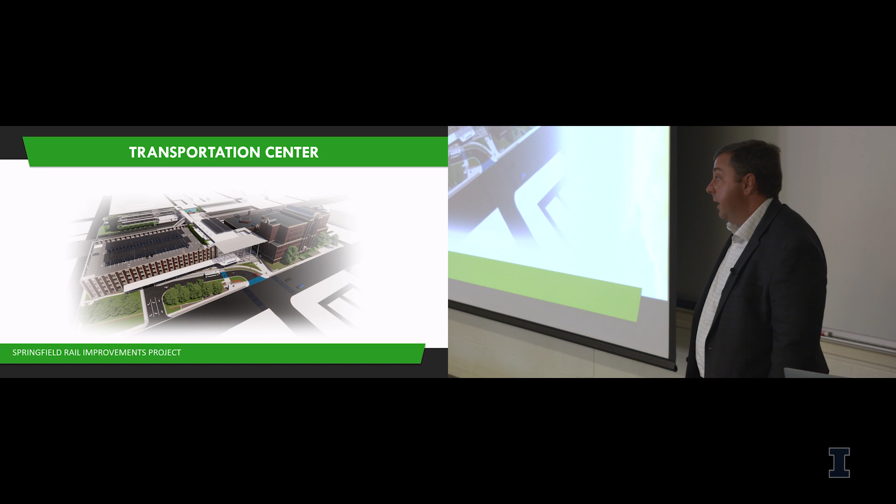You'll have the tracks right behind the building, kind of hard to see in the photograph, but they're right in the middle there. On the far east side of the tracks is SMTD, Springfield Mass Transit District, where the bus service is at in Springfield. So this new transportation center will have the buses and Amtrak together, which we currently don't have at the same location in Springfield. Along with what was just announced yesterday, Greyhound is actually going to utilize the SMTD facility as well, with 2 buses coming to that facility on a daily basis. Pretty exciting news on that aspect of it.

There's going to be a mural on the back side of the Sangamon County Transportation Center, SMTD, right here. It's going to have some historical figures from Springfield on it. I think sometime next year is when construction of that aspect of the mural will start.

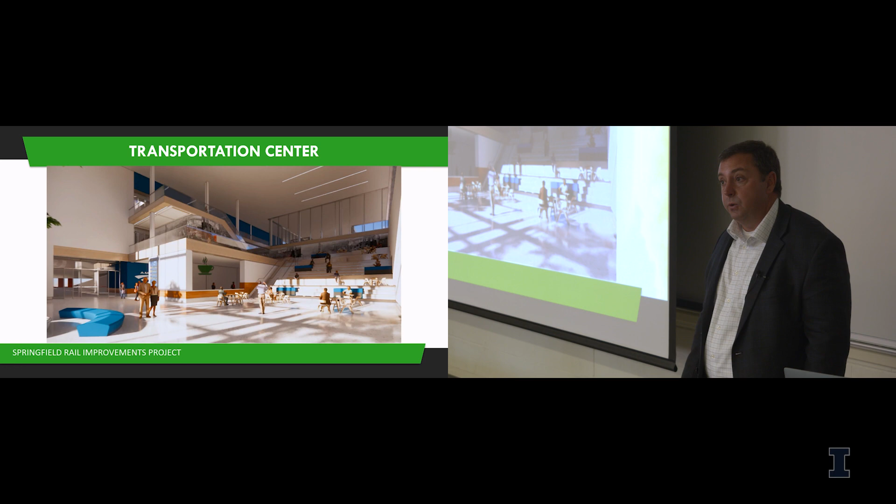Within the building, there'll be a cafe, a large stairway, and the Amtrak station. This is what they call the county square. This will be an area where, if you go to the right, you'd be able to enter the Sangamon County complex, the existing building that's there. Or if you go to the far left, you'd be able to go straight into the large parking garage that has about 600 spots for vehicles.

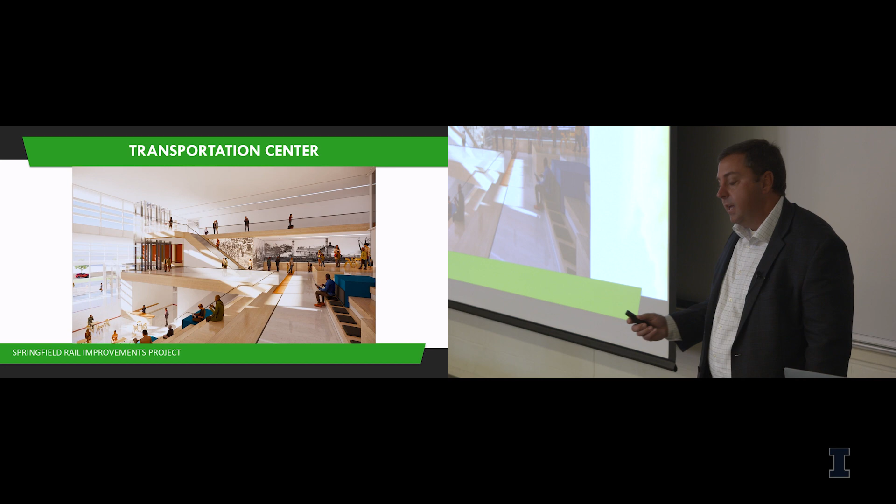On the second floor of the transportation center, as part of the project, we thought it'd be a great idea to incorporate artifacts and history of the 1908 race riots. Some of the things dug up within the race riot site are going to actually be on display at this location, as a way to incorporate some of that into the project. The top level is where pedestrians would go across the bridge over the tracks and back down to the other platform.

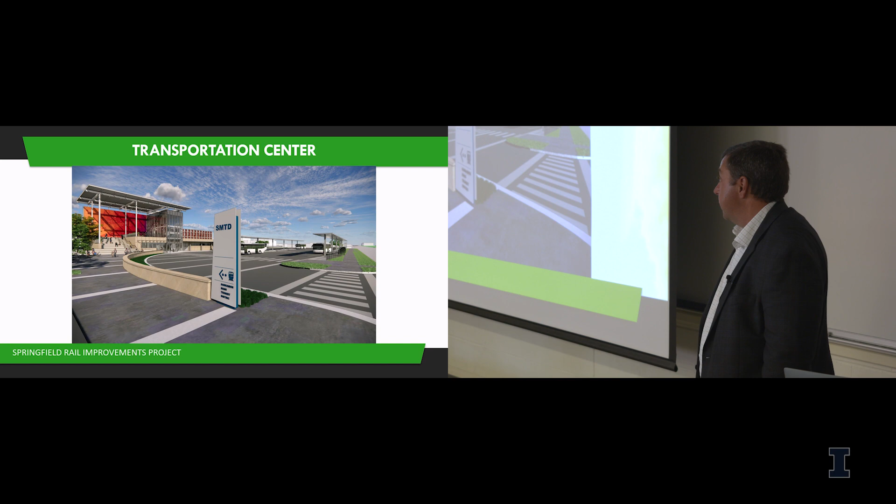Now this is on the far east side of the tracks, where the Mass Transit District is, and this facility is under construction right now. I've got some actual photographs of what it looks like under construction. The parking lot itself is complete, and you can see how many buses are there at one time, so it's a very busy facility. The building itself is going to have office space, restrooms, and a break room type area for the drivers. Part of what's being built will be the termination of the pedestrian crossing that'll go across the entire track width. Right here's where the tracks are at, and this will be the building, so when you come across the pedestrian crossing, it'll tie right into that.

Just another photograph of where they're at on the construction. This is probably about 3 weeks old, that photograph.

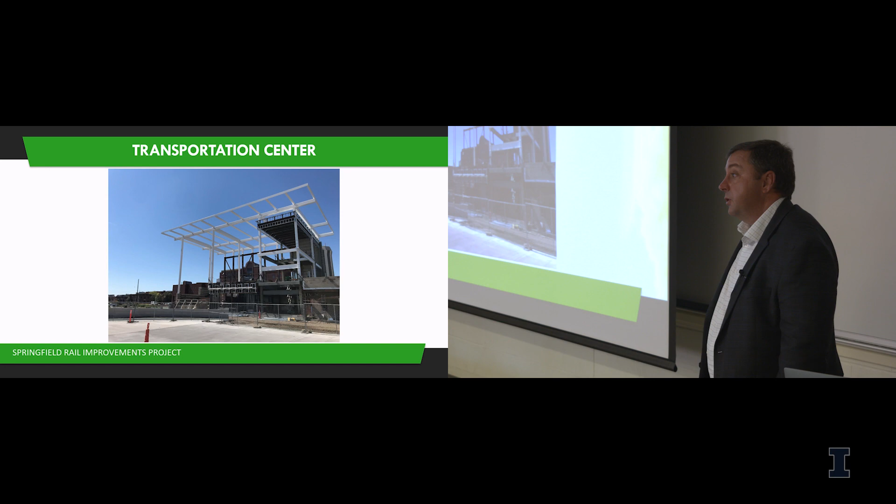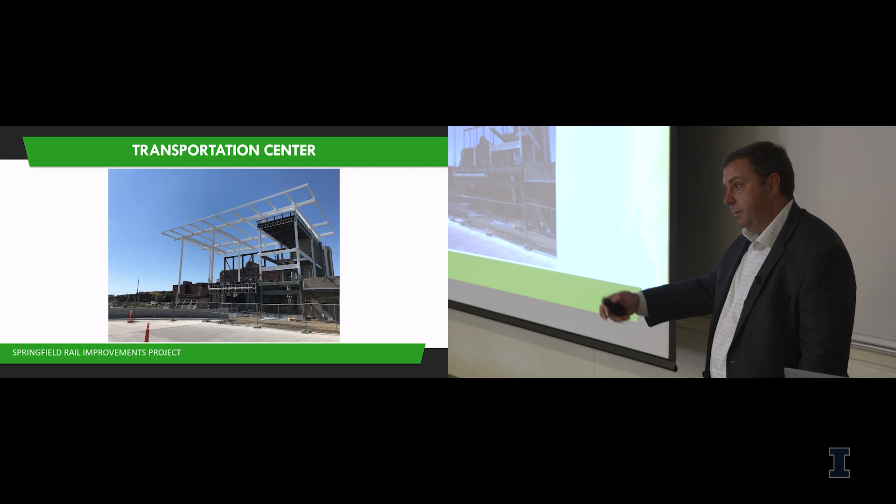Moving right along, they're hoping to get this part of the transportation center complete by spring of next year. Next summer, they will go to construction on the west side part. That's the part that has the Amtrak station, parking garage, and the overhead crossing that goes over the tracks, along with the associated platform for Amtrak passengers to board.

As part of the project, during the very beginning stages, this was part of our community outreach. We developed a grow our own plan, where we tried to get more minorities in the community involved with the project, hopefully steering them towards engineering. We've had a program developed in collaboration with Sangamon County and the City of Springfield, where we try to reach out to minority students in high school, get them interested and involved in engineering, with the hope that they do go to engineering and come back and have a very good job.

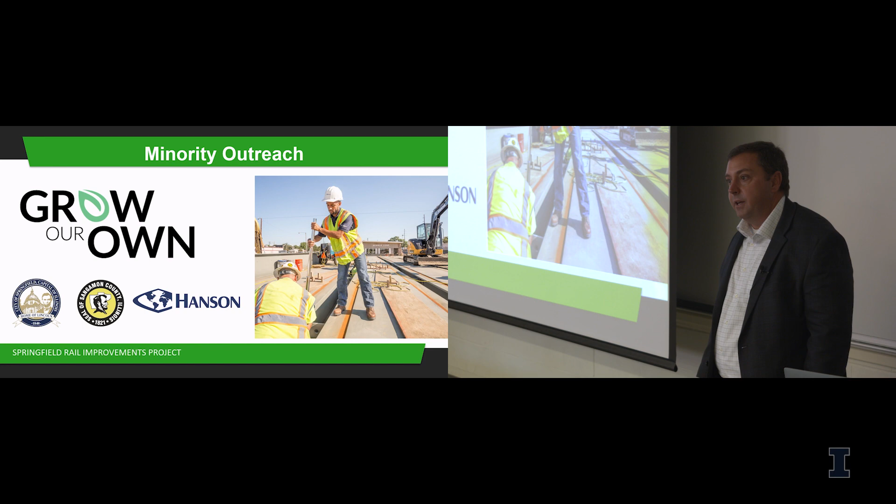This is one of our participants in the program. He was out in the field, actually torquing bolts down at this project, making sure they had the right tension on the bridge.

This has been a nationally recognized program through the entire country, where we're featured in ACEC magazine. So we've received lots of national recognition for it, and have had a lot of students come through the program on a yearly basis. We also bring them over right here to the University of Illinois Engineering Open House, where they get involved with the RailTEC program to teach them some things about different aspects of engineering. It's been a very good program and a way that has led to us being able to hire some students through it.

So some of the keys to success of this massive project - it's a lot of different disciplines, a lot of different areas, a lot of things. There's obviously land acquisition involved, engineering involved, construction involved, but one of the biggest things is don't ever give up, because you're always going to run into challenges.

Like the archaeology site, I'll use an example. We run into an archaeology site - oh my gosh, what do we do? Is the project dead in the water? No, you find a way to get through that. That's where we looked at shifting the tracks over a little bit more, doing some mitigation of the archaeology site, digging up any artifacts that are there so you can get the environmental clearance to proceed and continue on with the project. There's many things like that that you run into.